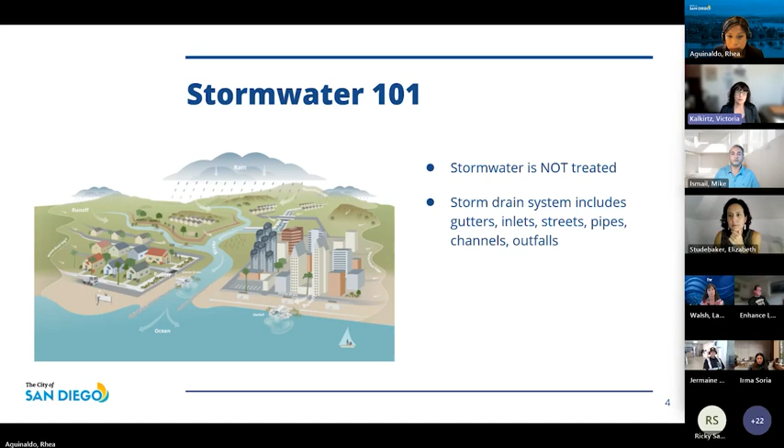This graphic actually does a really good job of illustrating what our storm drain system includes and how runoff works. The storm drain system includes a lot more things than you might think. It includes the curb, gutter, street, alley, inlet pipes, channels, brow ditches, all part of the storm drain system. Some streets don't even have pipes or inlets for many blocks, so sometimes water will have to travel a long ways before it gets to the closest inlet or drain pipe.

Because of that, discharges of anything other than rainwater, with a few very limited exceptions, are illegal. You might even see in places like North Park a big dip in the street that your car has to go over. That is also part of the storm drain system because water sometimes has to go a very long distance. Next slide, please.

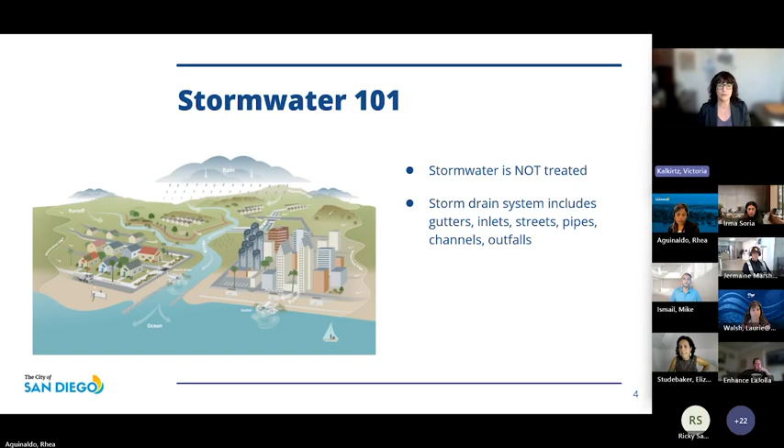All right, so I'm not going to get into all the details of our stormwater regulations. Our permit is several hundred pages long. I don't want to bore you with all of it, but I will touch on a couple of the regulations that guide why we're here today.

The City of San Diego and all other local jurisdictions are covered under what's called the Municipal Separate Storm Sewer System permit, known as the MS4 permit. This guides and regulates how we handle stormwater that leaves our city system and enters the receiving waters and ultimately the ocean. The San Diego Regional Water Quality Control Board, which Laurie is here representing, has jurisdiction over these waters and what we are allowed to discharge into them.

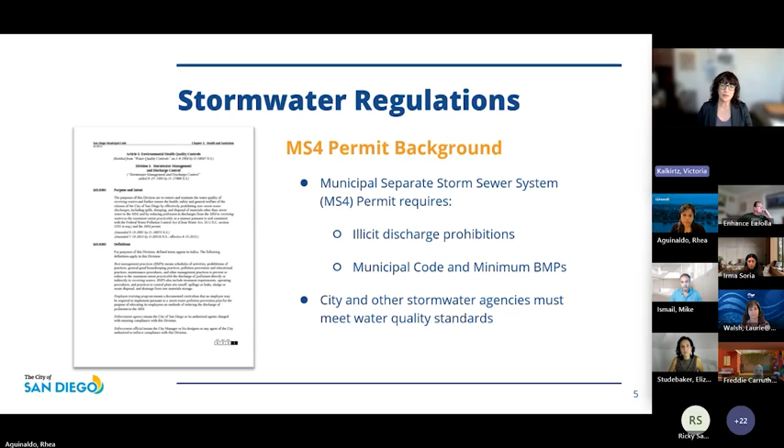This permit includes specific regulations regarding what is allowed and not allowed to leave our storm drain system, especially in dry weather. The permit also requires the city and all other jurisdictions to pass a municipal code that prohibits these kinds of discharges, requires BMPs for any pollution or potentially pollution-generating activity, and enforcement actions, including escalating enforcement, which I'll talk about in a few minutes.

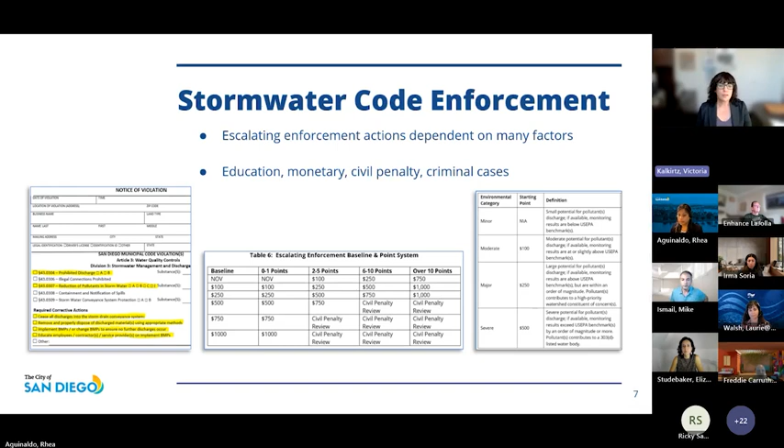A big part of our enforcement process is educating the public and businesses about what is not allowed and what our minimum BMPs are. So we have a lot of fact sheets. We've got a great website—you should check it out, thinkblue.org. And we have outreach materials for each one of the BMPs that we mentioned.

Anytime we do enforcement actions, we provide these. It has all the information you need of what not to do. I do want to note that our officers and our office cannot give any specific advice or tell you exactly what products you should be using or exactly how to do your power washing or whatever other activity it is. We cannot endorse any particular practice or product.

Every situation is different, and that's not really our place. You might have different equipment than someone else. That's not our place. Our place is just to tell you: no runoff, no wash water from the process can enter into our storm drain system.

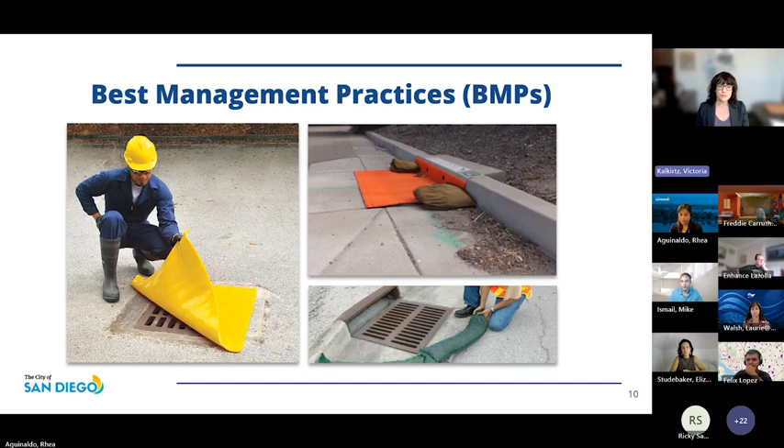This is a really great thing to do. Sometimes, even if you're close to the inlet and maybe a vacuum, you don't want it to fail, so put the inlet cover over there and you'll be covered. But again, we're not endorsing any particular product.

And it is okay to have the water come off a driveway or off the curb into the gutter, but it has to be collected and can't be traveling or running off down the street.

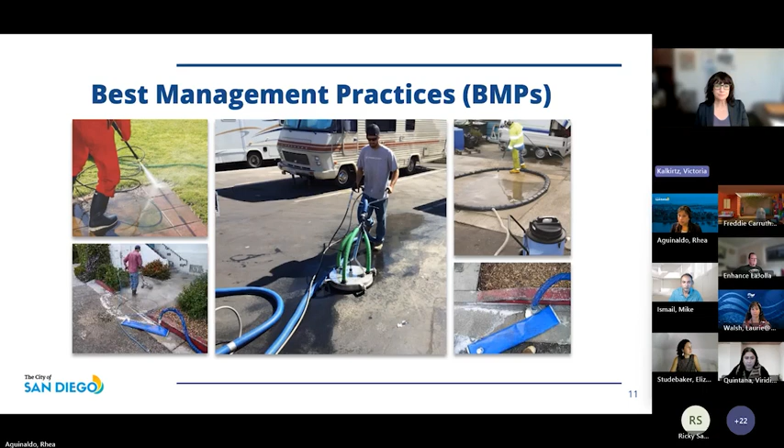Excuse me. I just wanted to mention a couple of other things.

Power washing is definitely more of a two-person job to keep those BMPs in place and effective. If you leave large pools of water behind, you may need to go back and vacuum them up. I know a lot of curbs sometimes have low spots, and if there's a ton of water there, it might be appropriate to go back and vacuum that up if you have your vacuum.

Just because you have a vacuum in the curb, it has to be effective - that's not always enough. So if you have two people, one paying attention or in charge of the BMPs, watching the vacuum, make sure it's actually vacuuming up or reclaiming the water. The other person can go down the street and do what they need to do. Just having a BMP there with you doesn't mean it's actually working - it has to be effective. So generally, we say two people should be on most of these sites, especially the larger ones.

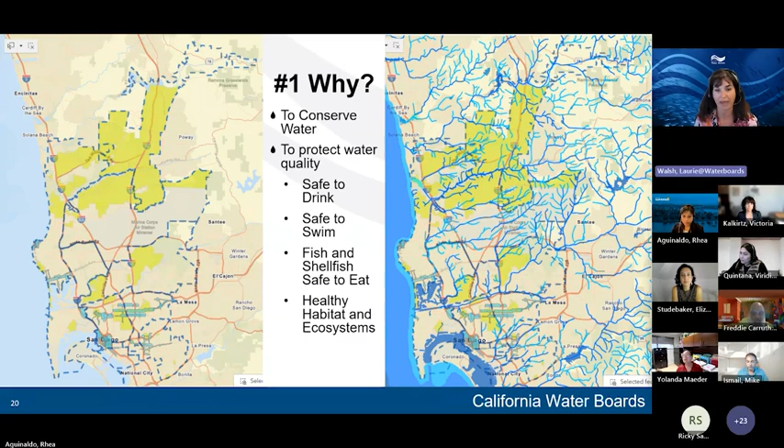And the regional board is responsible for protecting water quality and controlling the discharge of pollutants into those receiving water bodies, because we are assigned with the authority to make sure that the uses of those receiving waters are protected. These 4 main categories are what the board protects: is the water safe to drink? Is the water safe to swim in? Do the fish and shellfish that get harvested from certain water bodies, are they safe to eat? And are the habitats and ecosystems healthy within these receiving water bodies?

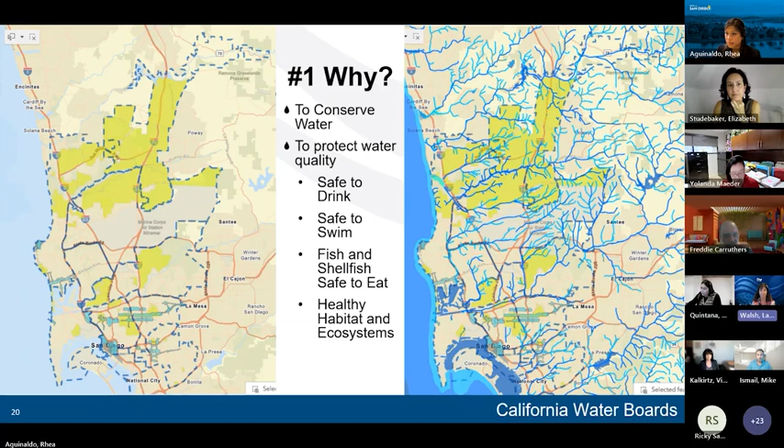The second reason why it's important that you make sure the best management practices surrounding power washing are effective, as Vicki mentioned, is it's illegal. It's not allowed via your contracts, it's not allowed via your city ordinance, and it's not allowed because it's against state law. Again, it's not only the city of San Diego that has this requirement, but it's every municipality within the San Diego Regional Water Board's region, and actually throughout much of the state. And the law that is the support for these requirements is the Clean Water Act.

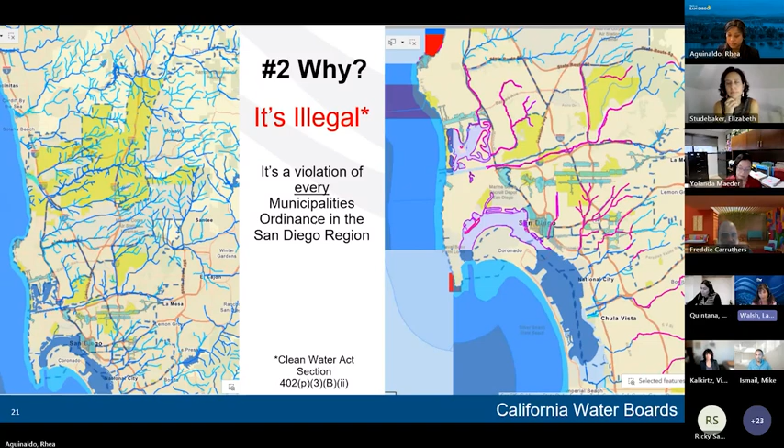And Vicki, I think that was a perfect thing to mention, is that in many cases it's more than a one-person job. This is a small area. I think this person, that was like their first customer of their first business they just started, ended up having my executive officer walk down the street, which he did, make contact with them, and called me, and I called Vicki, and the city responded to this within the hour. I think that doesn't always happen, it takes us a little bit longer sometimes, but in this case it was fairly rapid.

And Vicki, can you remind me, did they get a notice of violation in this case? I thought yes, they did. They got a citation as well as a notice of violation. Okay, all right.

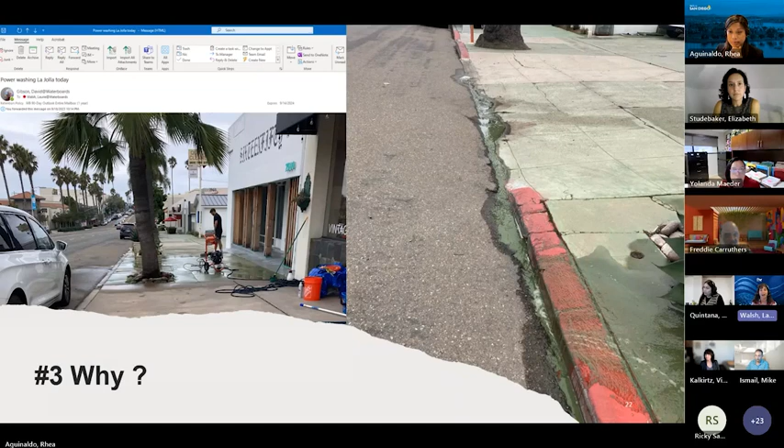The water board does a lot of monitoring, and cities do monitoring too, to give us information about when the receiving water is not supporting beneficial uses because it has too much of a pollutant present, in this case bacteria. It's important for all of us to know why we have to take extra effort to control the discharge of pollutants that get into the curb gutter. It makes more sense that these control measures need to be in place and working, because our discharges are causing these water bodies to be unhealthy. In this case, it's these locations in La Jolla, and the particular pollutant is bacteria.

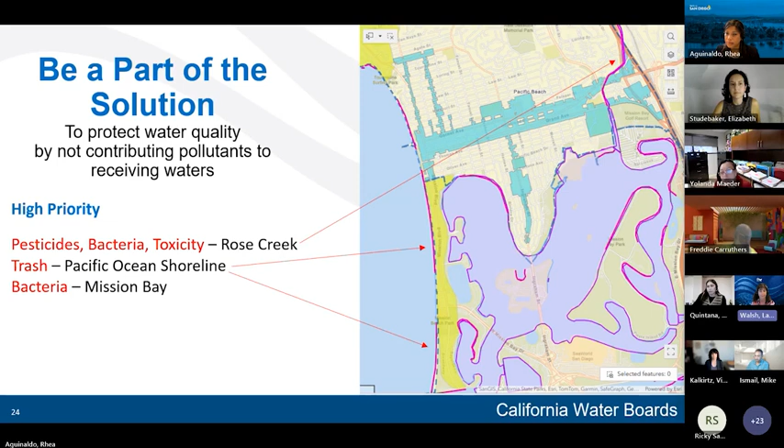Pressure washing is one of many sources, but it is incumbent upon all of us to control the discharges of pollutants that we are responsible for. Next slide, please.

San Diego Bay and the downtown area. The shoreline at G Street is impaired for bacteria. Switzer Creek is impaired for a set of metals - copper, zinc, and lead. And Chollas Creek is impaired for pesticides, trash, copper, and zinc.

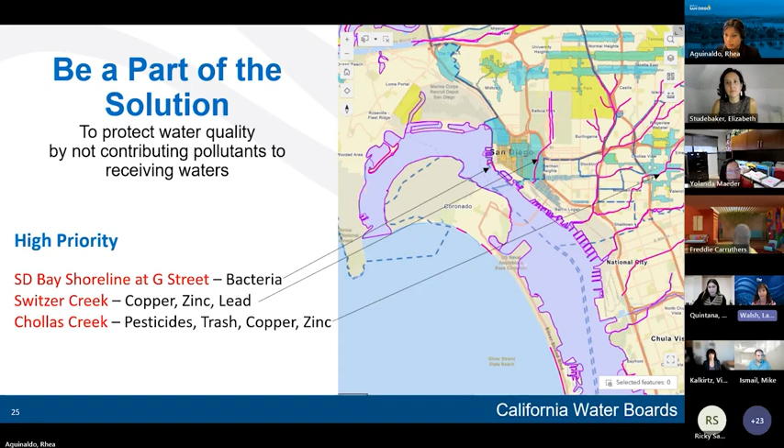I mentioned at the very beginning four main categories: is the water safe to swim? Is the water safe to drink? Do fish and shellfish harvested from those water bodies, are they safe to eat? And are the habitats and ecosystems healthy?

Those four broad categories break down into these 26 beneficial uses. There could be a whole handful or two handfuls of these beneficial uses that the receiving water your district discharges to is supposed to support. The receiving water body is supposed to be healthy enough, in its chemistry, biology, and physical characteristics, to support these beneficial uses. That's what the regional board is charged to do, and that's why we issue permits to people who discharge waste to waters of the state or US - to protect these beneficial uses.

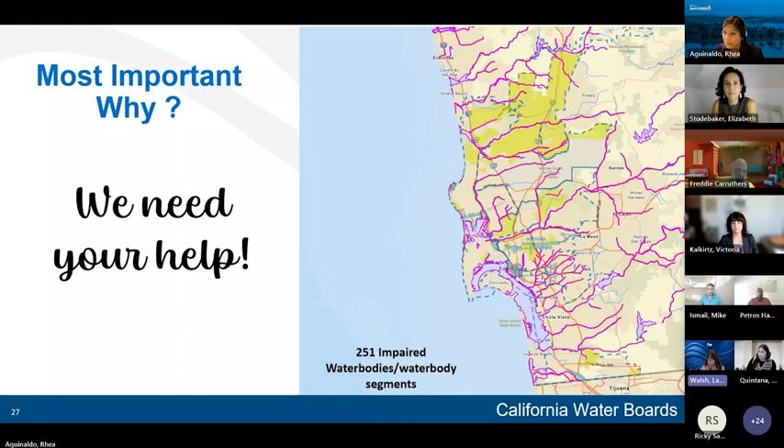Up next, I want to bring your attention, mostly as a reminder for most of you, to a few sections of the MAD contract that are applicable to power washing. The PBID downtown contract has a comparable section that refers to the city's stormwater pollution prevention program and the jurisdictional urban runoff management plan. Please make sure you review the scope of your agreement, which is Exhibit B.

This includes Section F on sidewalk steam cleaning, shown here. Section G, which discusses the requirements of district managers and subcontractors, provides more detail about your responsibilities and the manner in which services are carried out, such as maintaining a clean work area, methods of performing work, and safety requirements. Hopefully, throughout this presentation, you've been able to get a sense of where you stand with respect to compliance, and hopefully we'll be able to make immediate adjustments if needed.

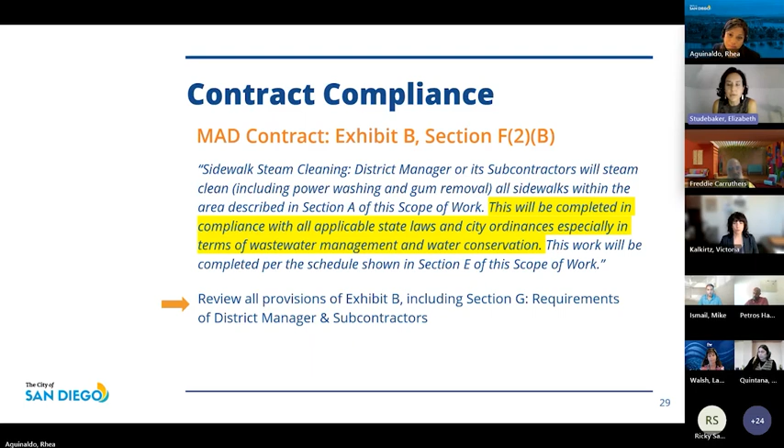Also, please note that if you're out of compliance with any of the components of applicable regulations, you're out of compliance with your MAD contract. We're going to do our best ongoing to continue helping to educate you on regulations and best practices, but being out of compliance with your agreement could result in a number of actions taken by the city, including not renewing your contract.

On the screen here, you'll see a section specifically discussing compliance of subcontractors and making sure that they are properly insured with respect to your scope of work — that's Exhibit B in your agreement. Language like this can be found throughout the agreement and relates to all aspects of your subcontractor's work.

Best practices include things like spot checks, regular reports, and ongoing communication. Another example of a best practice is requiring subcontractors to report any interaction with enforcement agencies, including complaints and/or violations. We have seen subcontractors on occasion withhold that information from our primary contractor, which puts the entire city contract at risk.

So now I'd like to introduce one of our contractors who has had some experience that we can all learn from about coming into compliance. I think he's on the line — maybe on the road, but I'm happy to introduce Ben Nichols with the Hillcrest Business Improvement Association, if he's on. Ben? Yes, can you hear me? Yep, we can hear you. Thanks, okay great, thank you.

I am happy to chat a little bit about our program today. I apologize for the background noise, I am on the road. My name is Benjamin Nichols, and I'm the Executive Director of the Hillcrest Business Association. I also want to introduce Ricky, our contractor from South Bay Power Washing, who's on the line, and we are happy to take questions at the appropriate time.